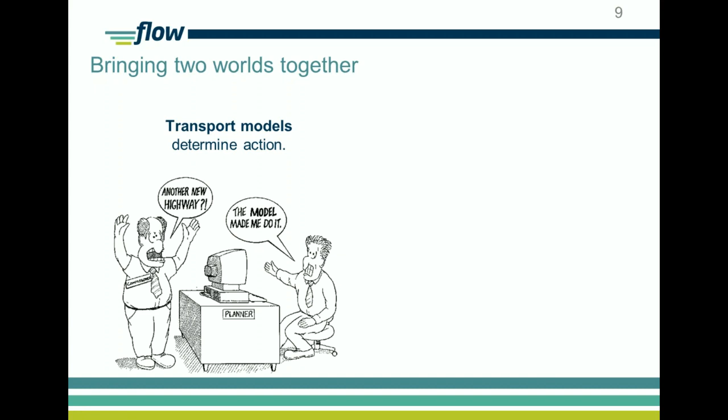So what Flow has done over the past 2.5 years has been to try and bring two worlds together that we think are actually meant to be together. On the one hand, we have transport planners and local authorities working with transport models. This informs decision making and determines action. And at the same time, cycling and walking are playing a larger role in people's transport choices. And so this is becoming a larger issue, but it's not always so simple to bring these two parts together.

Not everybody takes non-motorized modes seriously, and they don't always seem to count. And the lack of available techniques to analyze the impacts of walking and cycling measures on congestion has, in turn, often led decision makers to dismiss such measures as a means to address congestion. So the legacy of Flow is that we've brought together the two worlds at one table, but there's still a lot to do until there is a happily ever after.

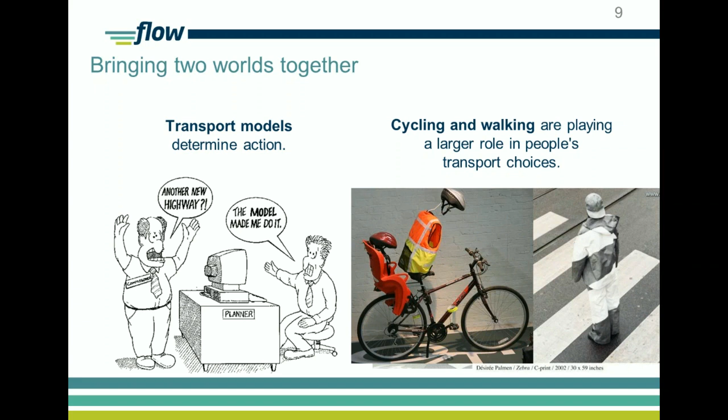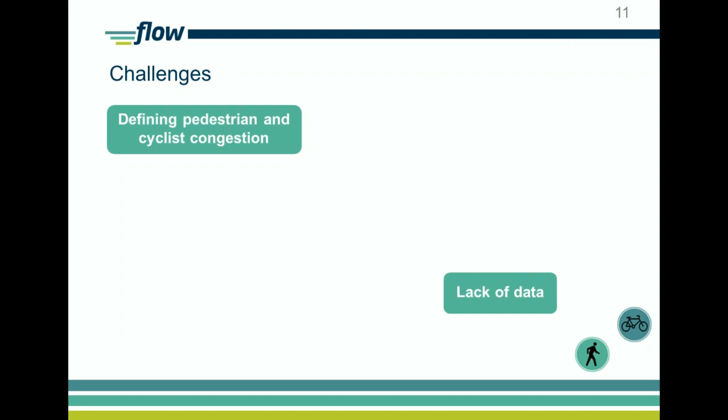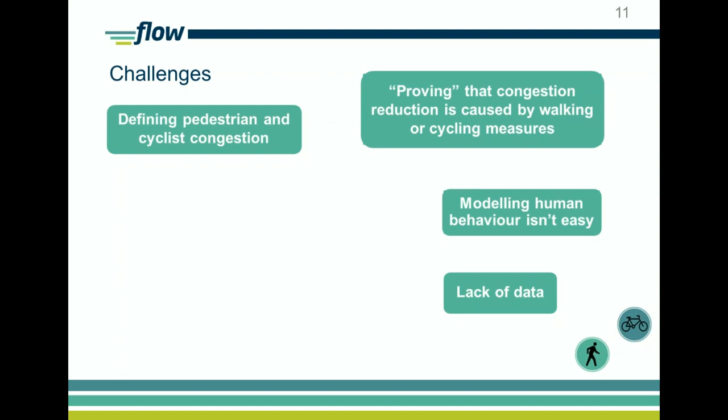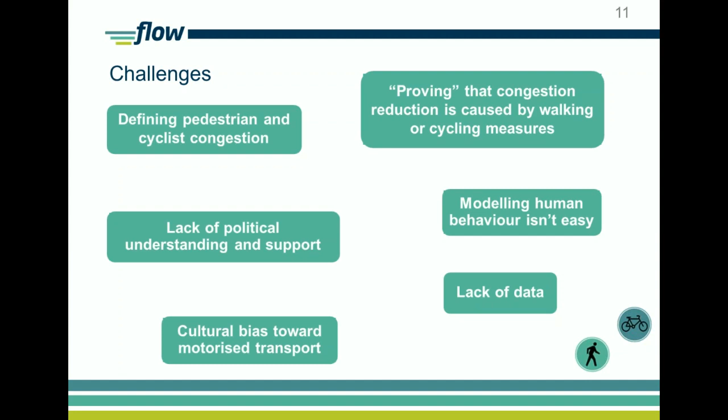So again, over the past 2.5 years, we've had a number of challenges that we've had to address in Flow. First of all, defining congestion, pedestrian and cyclist congestion. What does this look like, and what is our starting point with that? There's also the very big issue of the lack of data for pedestrians and cyclists. And just simply modeling human behavior isn't easy. Furthermore, proving that congestion reduction is caused by walking or cycling measures is also a tricky one, which we've tried to address. And lastly, in more of a policy angle, there does tend to be a cultural bias toward motorized transport and also a lack of political understanding and support for integrating walking and cycling into measures for reducing congestion.

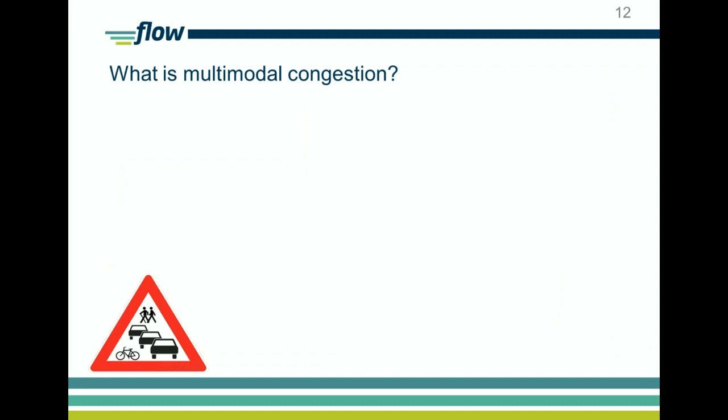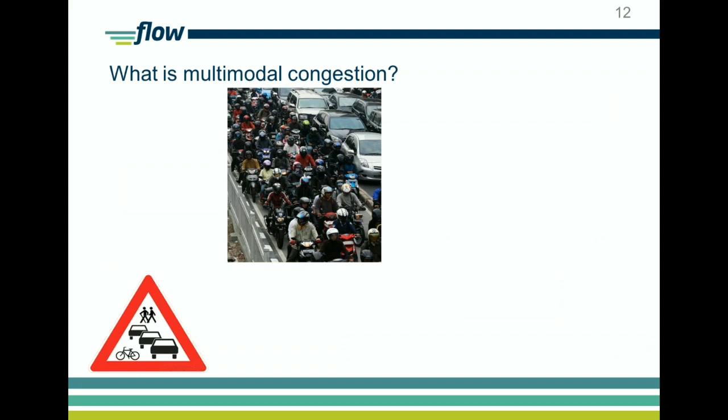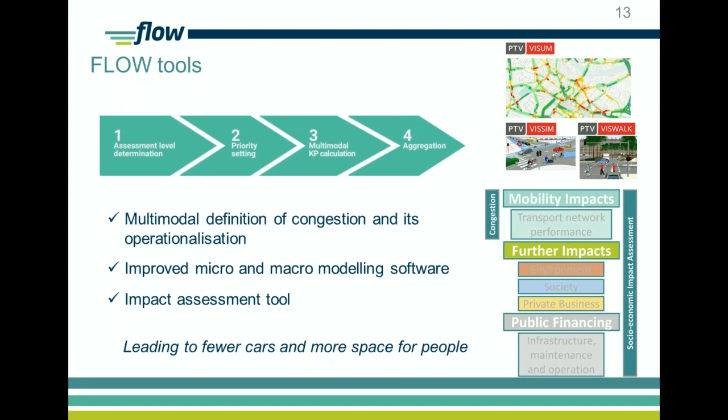So these are the questions that we started out asking ourselves, and to address the technical component of this, Flow has developed a portfolio of tools which can be used to assess walking and cycling measures for their impacts on congestion, as well as their wider societal, environmental, and economic impacts. And so we've been working together with transport planners, decision makers, and consultancies across Europe to fine-tune these tools and to ensure their usability and take-up in their everyday work. But this requires a transition process, and it also requires some political convincing.

And so to address the political component, Flow has produced a number of resources, including a portfolio of measures where cycling and walking measures were successfully implemented to reduce congestion. We also have 15 quick facts for cities. And we have an animated video which sums up very neatly the technical and political aspects of Flow and how you can use these tools, how they can inform decision makers.

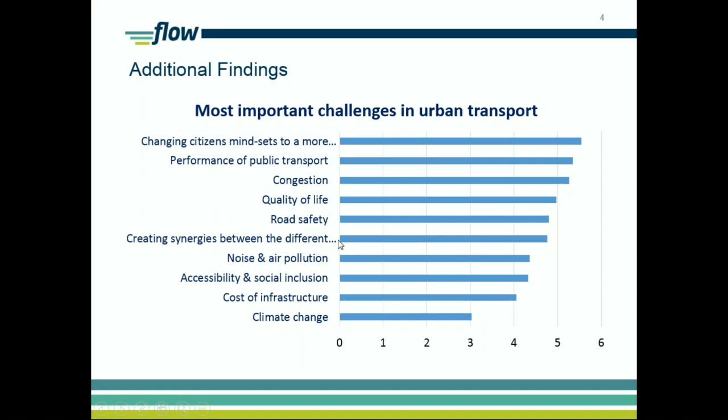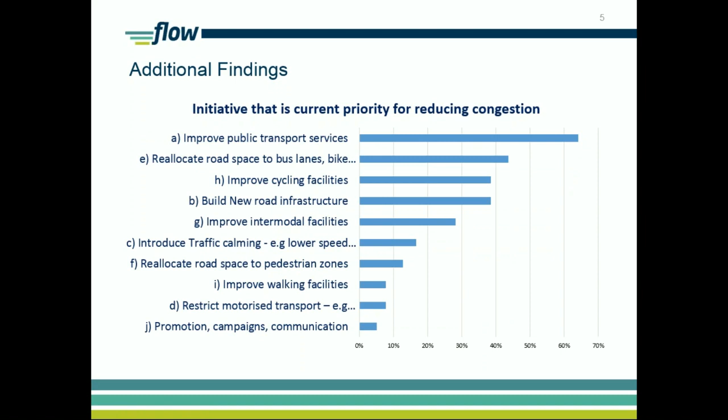Another initiative which we noticed was high on the agenda for decision makers is public transport, which is also very important to note, that we somehow have to incorporate this when we want to convince decision makers of walking and cycling measures as a solution for congestion.

The good news, however, from the survey was that even in cases when decision makers are worried about congestion, they were still introducing cycling and walking measures, as you can see from this graph. So that was a positive note to end with, that even though decision makers might be afraid about introducing walking and cycling measures and the impact on congestion, they're doing it anyway. So this is a bit of a first introduction to the policy context within the Flow project. And now my colleague Luz will tell you about what things you can do to actually go out and influence your decision makers.

Yes, hello everyone. My name is Luz Holtmaat and I also work for the European Cyclists' Federation. So after completing your survey, you know your city has a congestion problem. But how do you know if your city is ready to implement solutions for that congestion problem? And this is actually about understanding policy decisions and policy influencing.

So you can ask yourself the question, looking at cities, because they are constantly evolving, who influenced the change? Who made it happen? Why do some fantastic policies not happen? And why do some other policies that are not expected to happen suddenly become a top priority for policymakers? Understanding the policy making, how can you also check if your policymakers are really ready to implement the policy initiative you suggest? And if they are not ready, what can you do? We call this the how.

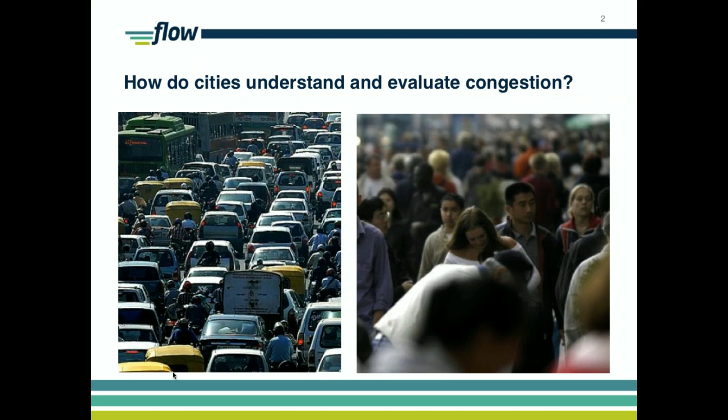And we've heard already that often decision makers want to do something differently, and the technicians are like, oh, it can't be done, transport systems, we think about it in this way. So what we've sought to do through the Flow tools, and I'm going to talk about these 3 tools to support decision making, is bring together some traditional transport system approaches and introduce walking and cycling into that framework.

What we've also got is integrating the transport benefits as well as the broader social benefits and impacts of transport decisions. Historically, transport systems only assess transport impacts. And this is where walking and cycling have fallen over, because if travel time is your measure of success, then walking tends to be a bit slow for that.

But if you are wanting a system, and as a decision maker, you're wanting a system that answers a range of questions for you and brings those broader benefits to play, then you want that integrated with the transport decision making as well. And lastly, our transport modelling tool brings walking and cycling into those macro and micro simulations that are possible. I'm going to talk a bit more about the multimodal congestion assessment tool after our Lisbon case study, and I'm going to also talk about modelling and how these two tools are being integrated into decision making.

So just a little bit more about the impact assessment tool, because this is the example that we have from Lisbon. And what is fantastic about this is for a long time now, walking and cycling have been valued for their health benefits, and we've had the health impact assessment tools developed by the World Health Organization. But this is where transport tools are actually integrating those broader benefits into an analysis of the transport system. And we can see this in the Lisbon example.

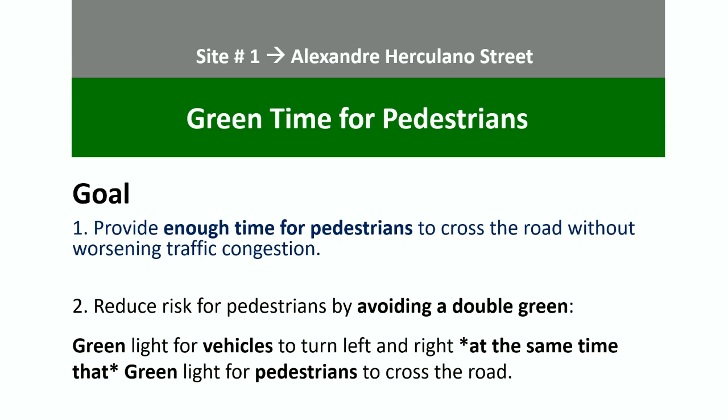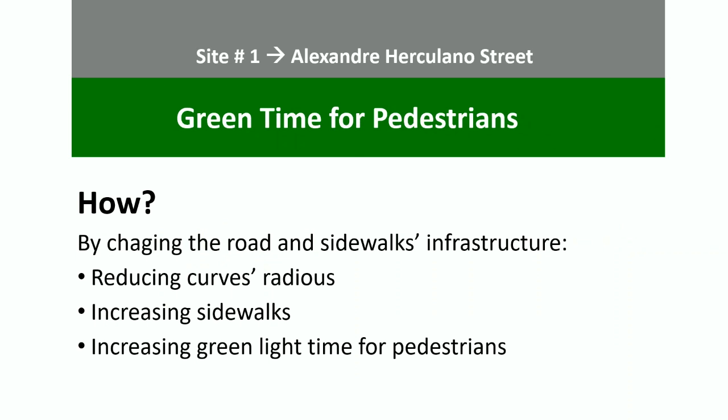Okay, and how did we go about doing that? So we thought, okay, we can change the infrastructure, and we can change the green light time for pedestrians. I'll show you how we changed the infrastructure in a bit. Sorry. So what did we do here? We defined several scenarios for this area. So how do we want to change? Do we change the road? Do we change the sidewalk? Just the green light times? We defined a few ones.

We conducted traffic and pedestrian counts on all sites. And why is this important? Because to model the area, you need all this data, several types of data per mode, pedestrians, cycling, not just motorized traffic. And after modeling several scenarios, we extracted the data. And with the data from the model, we filled in the impact assessment tool. And we compared the results for several scenarios. And this is why the tool is so important, because as Bronwyn was saying, it brings together a lot of variables, environmental, economic, and it puts walking and cycling at the same level as motorized traffic.

And you can compare the results with all these variables in just one tool. Okay, so to show you what we did. So this is the street we were working on, and where we defined the scenarios. I'm going to quickly show you two of the scenarios, what we thought of doing.

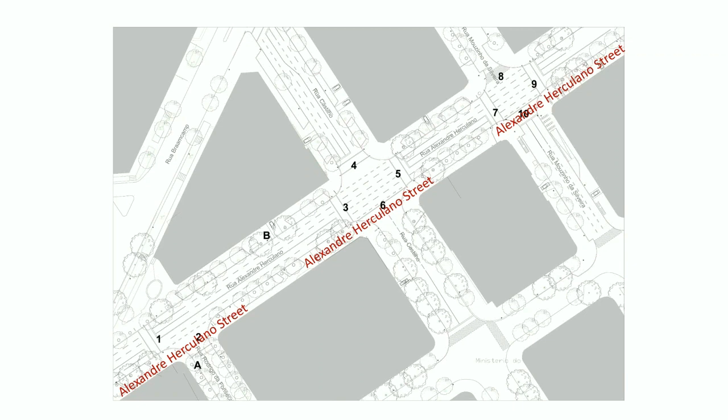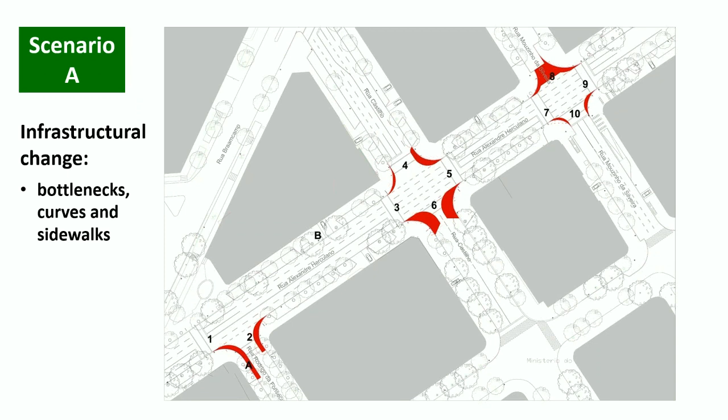Okay, for scenario A, the area that you see in red was road, and in this scenario we thought, okay, this area will become a sidewalk. So what will happen is that for people to cross the road, the distance becomes much smaller. Okay, so you act on bottlenecks and curve radius. Comparing with scenario B, you do that, but you also change the green light time for pedestrians. And we compared to see, okay, how does scenario A work and how does scenario B work, and how did they do?

I wanted to run the first poll before I move forward. And maybe Hannah, you can launch question number 1. Okay, so the question is launched. Okay, so the question is, does your city council model motorized traffic and soft modes? So yes for both, yes just for motorized traffic, just for soft modes, or no, or you don't know.

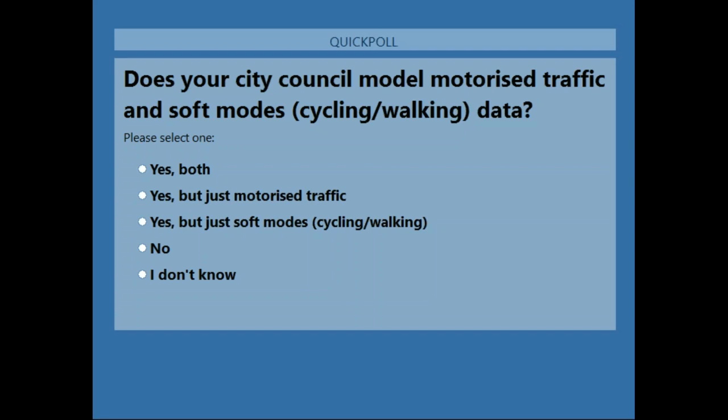Okay, so we can see that the largest percentage is yes, but just motorized traffic, so that's 45%. And then followed by I don't know, at 35%. 10% said no, and 5% each said yes, both, and yes, but just soft modes, cycling and walking. Can you please remind me the percentage for yes for both? Yes for both is 5%. Okay, so the majority is just for motorized traffic? Yes. 45%? Yeah. By far, okay, yes.

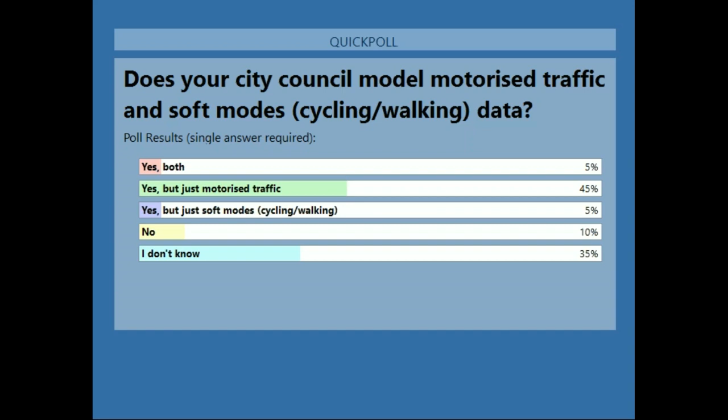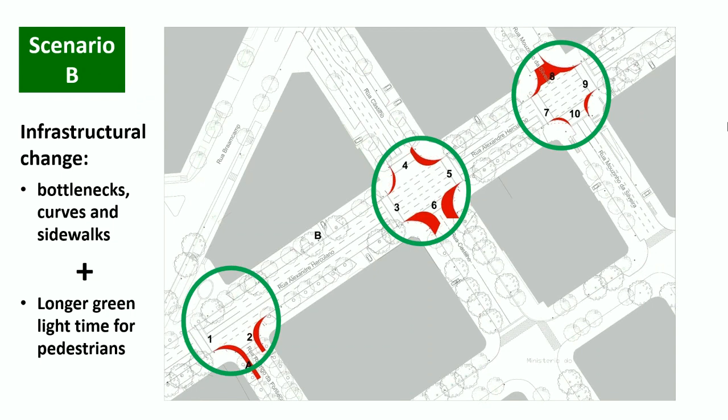So I just wanted to emphasize here why the impact assessment tool is so unique and important, because the data from modeling pedestrians and modeling soft modes and cycling comes in the same tool as, oh, let me just take myself from the screen. Okay. So that's why it's so important, because it brings these soft modes to the same level as motorized traffic.

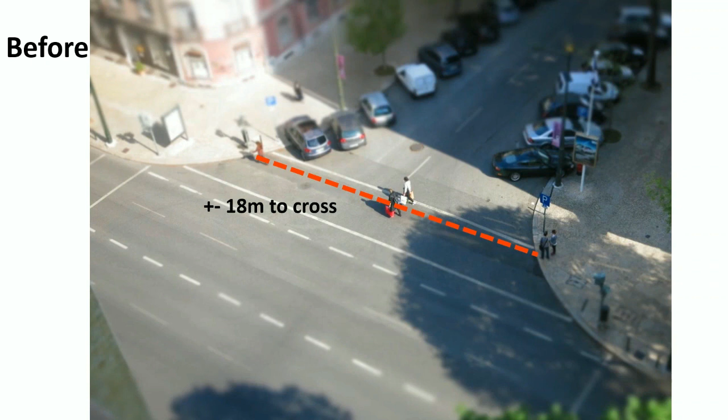Okay. So going back to the measure that I was telling you about. So when we acted on the bottlenecks and the curve radius, this is the before scenario. So pedestrians had to cross about, can everyone see me? I'm having a strange noise here. Okay. So pedestrians had to cross 18 meters, okay? And the after scenario, this is what we did. You have to cross only 5.5 meters, more or less.

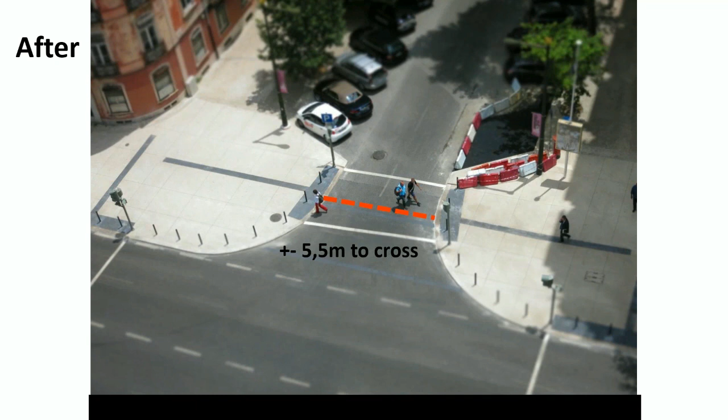So this is a special situation because we've already done the construction. So just to compare side by side what we did. Okay, so we have other scenarios, but for this case study, I'm showing you just two because they're quite easy to compare. And we also acted on the green light times, and I'll show you the results at the end.

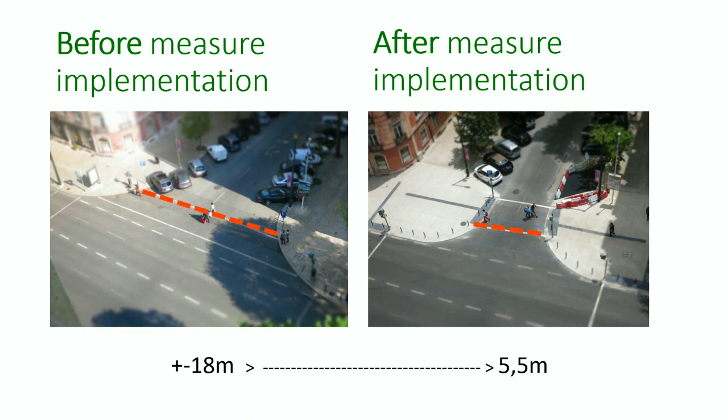So after modeling the several scenarios with Vissim and the help of PTV, we extracted the data from the models to fill in the tool, and we went through this target system. So we had data for what we call society, data for public financing, for economic aspects, for transport, and for the environment. I'm just going to quickly show you a few examples of what that data really is.

Okay, so we consulted with a few experts, and in the Lisbon case, we projected that there will be at least 20% fewer accidents, runovers, and collisions, both for severe injuries and light injuries. But this is something that your local authority has to project and has to consult with specialists.

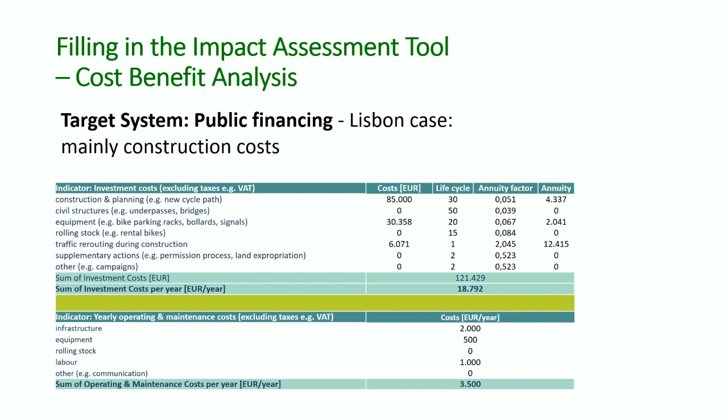Okay, so for public financing, in the Lisbon case, it was mainly construction costs that we had. So again, this is just an example of our own costs and how to fill in the tool. Okay. For the attractiveness, in this case, Lisbon didn't consider this target system, and I will explain why.

This addresses the real estate impact, but in our particular case, prices for housing and for real estate and commercial things are increasing a lot, but due to other variables. So for the sake of the tool, we considered 0 because we thought it was not an important variable here, because we couldn't really assess how much it was impacting.

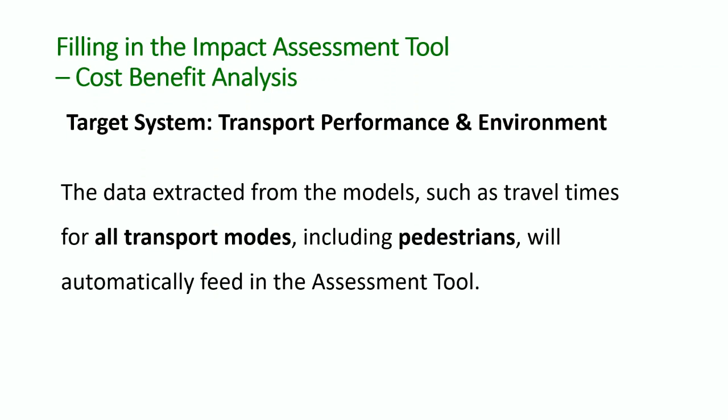Okay, and for transport performance and environment, the data that you extract from the modeling will feed in the tool for a lot of things. So I give an example further ahead. For instance, depending on the type of vehicles you have in the area, the type of fuel, the speed, the travel times, and travel times is again calculated by the model. The tool will tell you environmental costs.

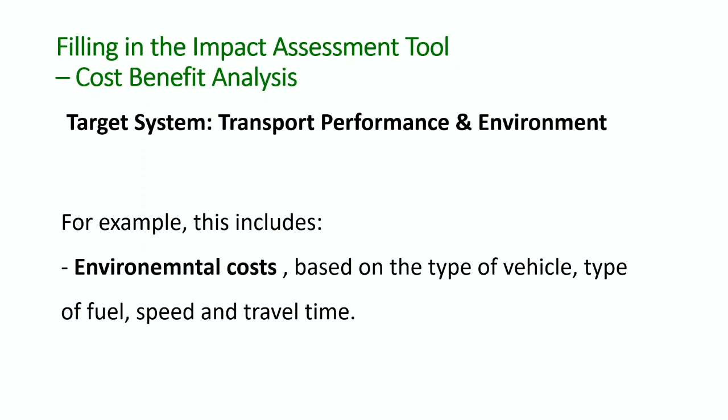How much time do you lose in traffic? What sort of pollutions? What sort of emissions? So the modeling will tell you travel times, and the tool calculates that automatically. You don't have to do it. You just put the data, and the tool has all those formulas behind.

Okay, so just to summarize what sort of data we used: model data for the environment, transport performance, and economic, for instance, energy consumption, and we used other data. We had to look for injuries data, we had to look for public financing data, quality assessments, those sorts of things. Okay, and now maybe we could run poll number 2, please.

Okay, so the poll is running. Okay, so I was curious because we had some difficulties with it, and it was just to share our experience. If your city council has easy access to traffic injuries data, such as runovers, collisions, where they happen, what sorts of severity they cause in the injury. So it's yes, but it can take a while to get it because another organization perhaps has that information, or no, or you have easy access to it, or you don't know.

Okay, we have 74% who have voted. We'll just leave it open a couple more seconds. Okay. Okay, seems like that's what we'll get, so we'll show the results. And we have 24% said yes, but it takes a while to get it. 29% said yes, and they have easy access to it. 12% said no, and 35% said, I don't know.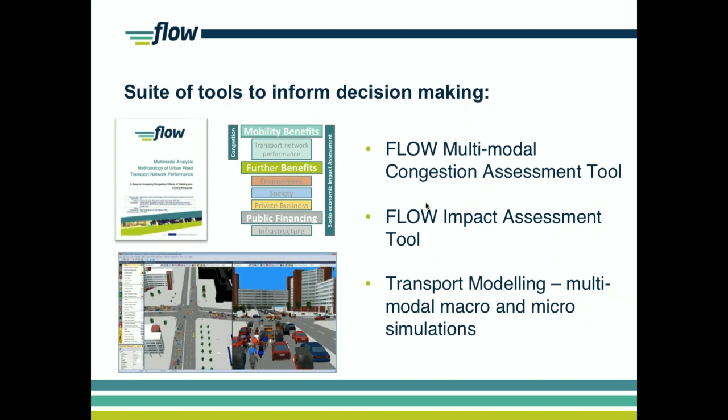I want to talk a little bit more about applying the tools. And just to remind us, we've just had a bit more of an understanding of how you integrate other issues into a transport decision with the Flow impact assessment tool. The one I want to talk about initially, and we have the multimodal analysis methodology and we have modeling. So very often it's like, well, which tool do we choose? Do we have to use all of them? What answers do these different tools give us?

Because very often, if you're not the technician using the tool, but you're the person who wants to understand the system, it's the question you ask that determines the answer that you get. So transport system performance tools generally answer questions about how can we quantify what we term congestion? How do we measure it? How do we know that we've actually got congestion? And what are those tools for measuring it? And I'm going to talk about that in a minute.

Transport models actually help us predict what will happen if we change something. So we can put different variables into a transport model and see those results. So if we change a street layout like you've seen in Lisbon, how will that impact on traffic movement? And then the impact assessment tool, which you've just heard about, helps us evaluate our options in robust and transparent ways and bring those broader impacts in, as we've talked about. So it's always, it sounds silly, but the question you ask will determine the answer and the tool that you seek to answer those questions.

So transport system performance, I'm not a transport planner, so I can't talk about this from a technical perspective, but there's some critical factors that you need to understand. Essentially, transport, there's a few measures. One is, what is the demand on the space relative to the space that's available? And what is the amount of delay relative to what's perceived as an expected journey speed if there were no blockages by sheer volume of other traffic in the way? And then the level of service is quantitative measures to get a standardized form, and then that determines what level of service you can provide on different network elements.

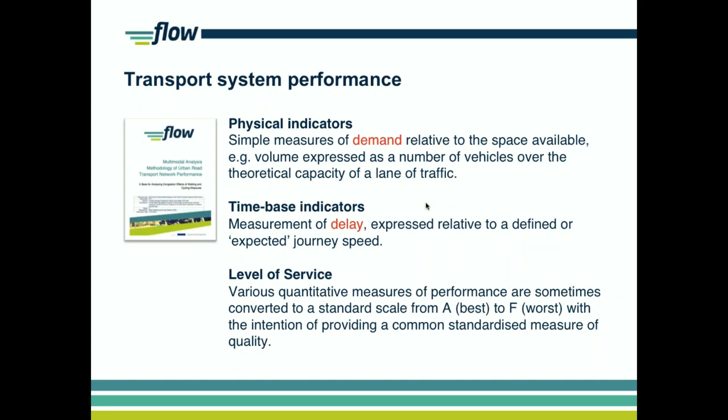But the things I want to talk about are demand and delay, because what we're trying to do at Flow is to look at things differently. So what if we took this vehicle-centered approach and applied it to pedestrian movement? So in Sydney, Australia, I'm bringing an example from there. They finally measured walking in their CBD. Data, this shows how important data is. And what they found was that the demand on the space was that 92% of journeys in the central business district are walked journeys. But here's the killer statistic. 52% of journey time is spent waiting to cross the road, which is delay.

So in a traditional transport model, you have incredibly high demand in the space and very poor performance of the system in terms of journey time, because 52% of a journey is spent standing still, like these poor chaps here in Australia. That's actually Melbourne, which confuses you, I appreciate, with Sydney, but it's such a great image of people stuck to the spot waiting to cross the road. Now, we haven't historically considered pedestrian waiting time to cross the road as a congestion issue or a journey time issue because we prioritised motorised traffic.

But what if we did model people instead of vehicles? What if we did take this approach? And this is where our Dublin city, partner city, has done a very interesting process. And the things to remember with Dublin, building on what you've been hearing about in this webinar, is that they got some data together. They had a broader political dynamic going on, which gave them the political courage to even consider modelling something quite radical and quite different to what they had been thinking about. So instead of counting the number of vehicles that they could move through this intersection, they counted people.

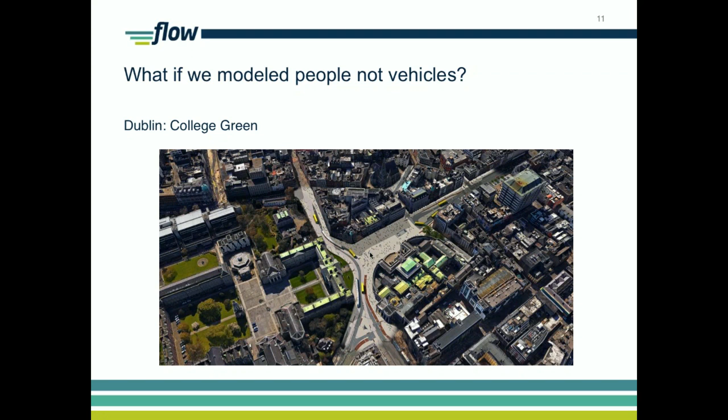This is an important bank, but this is also where, when they have significant people come to Dublin, Barack Obama when he was president, the Pope, this is where they address the crowd. And so what they did with the modelling was decide to model people in this space instead of just vehicle movement. And what they found out was that if they actually introduced a public square, they could improve the transport performance of this part of the city by moving 700 more people during rush hour.

Now, this is a great result because, as I said, Dublin had the data, a critical factor. They also had the political will to actually run with the idea. And I think that's what's really interesting. And then the modelling gave them the courage to go public with the idea because they knew that they had a positive response to the questions that needed to be answered.

So when we start thinking about answering a question like congestion, perhaps a better way to think about it, and some of you will have seen these ideas, is congestion versus corridor capacity. If we don't want to just keep building out and making wider and wider roads to accommodate our vehicle movements, we have to think about moving people, and people in modes other than the private motorized car.

So the picture on the left, you can see there's a bike lane, there's a sidewalk, there's cars. The cars are blocked up, but there's plenty of space if you were on a bicycle to move through that. The image on the right is from the Global Street Design Guide, and it shows the difference in capacity for a corridor if you turn it into a multimodal corridor. And you can see it's a shift of 12,300 people per hour to 30,000 people per hour. Now that includes a public transport option, which isn't part of the flow tools, but the message is the same.

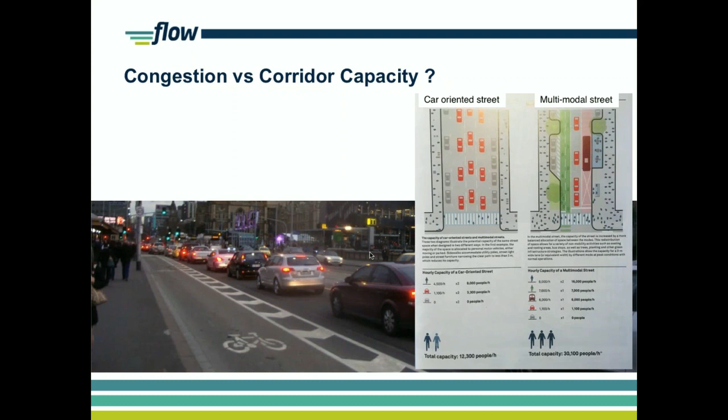And so to try and help make this a little bit easier for decision makers, and to provide communication tools for people to bring to their decision makers, to share with each other and to take the confidence to try doing things a bit differently, we developed a range of tools. And one of the reasons that we've developed our quick facts for cities is because people are still struggling with motor vehicle congestion and are worried about that. We've heard that from Caroline in our survey. So the quick facts: walking, cycling and congestion. No plainer than that, really. And it's a really great collection of ideas for cities.

So you've seen the Dublin example already, and this is the example from Lisbon captured as a quick fact, because it's not just that Dublin says you can improve people movement through your intersection with a multimodal approach. The Lisbon example says that you can make improvements for pedestrians without increasing congestion, which is also a valid factor that people are worried about. And by improving pedestrian movements, you can also reduce bus travel time, which makes your public transport systems more attractive as well.

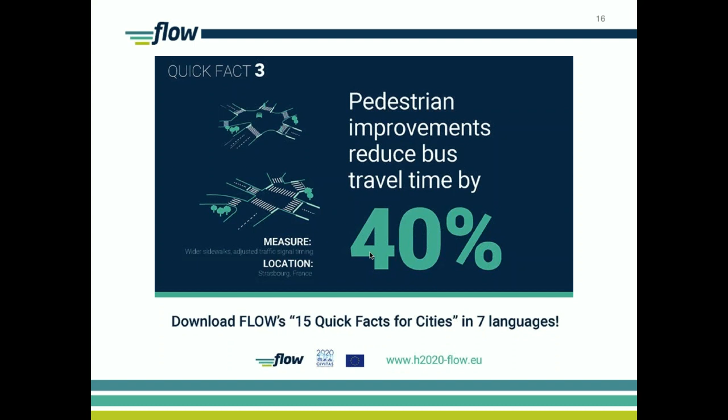So there's 15 quick facts. I've shared 3 with you because we don't have all day to run through all of them. But what these quick facts do is enable that communication, to share the answers and to give the confidence to potentially make slightly more controversial decisions. So let's make those invisible cyclists and walkers more visible and more apparent in our system.

This is another tool that we've provided for you, which is the role of walking and cycling in reducing congestion. And there's more detail about some projects which have improved things for walking and cycling or actively used walking and cycling to reduce congestion. So another set of examples to draw on for opening the conversation with your decision makers, or if your practitioners need a different perspective on how to use the tools that they have available or to seek new ways of using those tools.